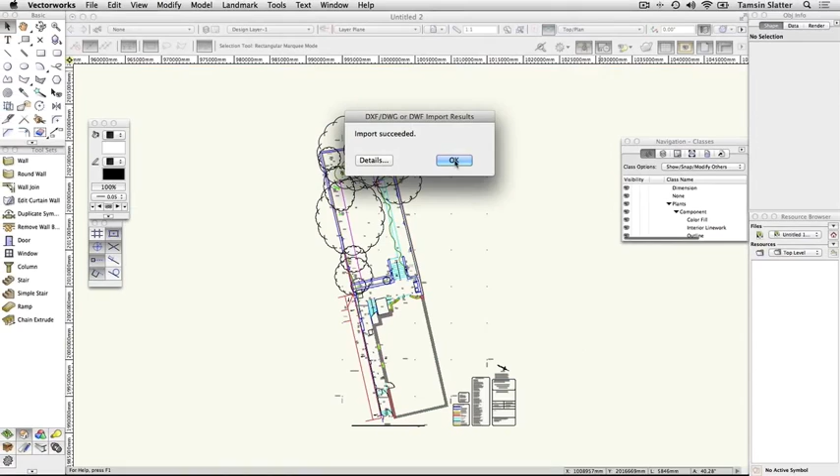Now examine the file structure. Turn your attention to the navigation palette. Click on the Design Layers button. Design layers represent the piece of paper on which you are drawing. They are usually used to separate items in 3D space, think of the floors of a building, or to separate stages of the design process.

This file contains the original Design Layer 1 and a new design layer with the same name as the imported DWG file, and this is the active layer.

Click the Classes button on the navigation palette. If you're familiar with AutoCAD, these classes are the equivalent of DWG layers. Classes are a classification system used to distinguish different types of objects from each other. There are many classes in the file, their names all prefixed with the word survey, so that you can clearly distinguish them from your own classes.

Press and hold the Alt key on Windows or Option key on Macintosh and click the disclosure arrow to the left of the survey class. Notice that you can close the list of classes in this way. Press and hold the Alt key on Windows or Option key on Macintosh again and click on the disclosure arrow to open the list of classes.

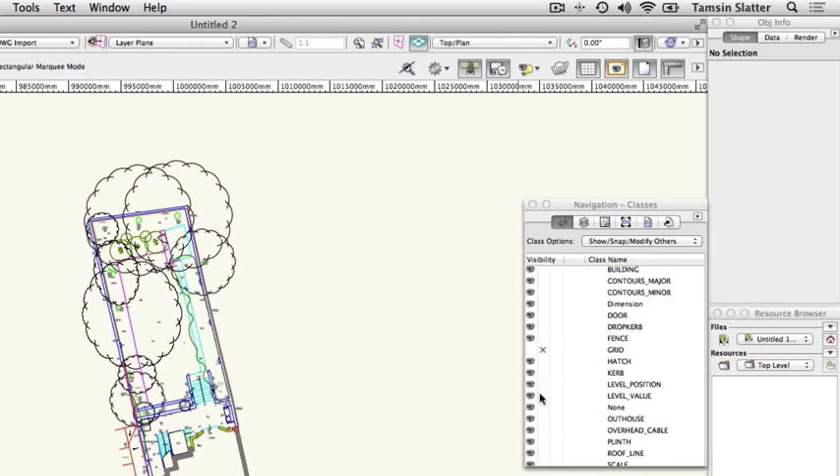Three columns to the left of each class name represent visible, invisible and grey. Locate the class Survey Level Value and click on the invisible column to its left. All elements on the drawing belonging to this class are now invisible. Restore their visibility by clicking on the visible column.

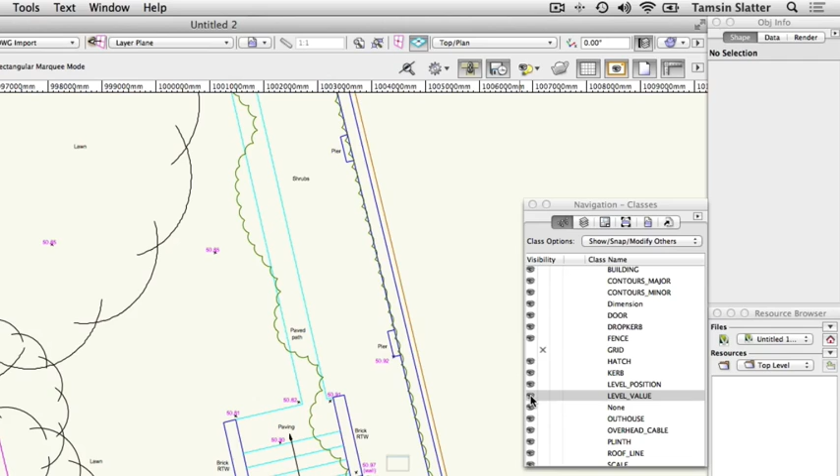Both design layers and classes can have their visibility controlled using the navigation palette. However, they have different purposes. Design layers are the physical location of the drawn objects, while classes are like a club membership used for classifying different types of objects. You can edit classes to add graphic attributes to them so that all members of that class look the same. Change the scale.

After you import the file at 1:1, you may wish to change the scale. 1:1 is always a good starting point with imports, as it's likely the scale at which the file was created, but you may wish to work at a different scale.

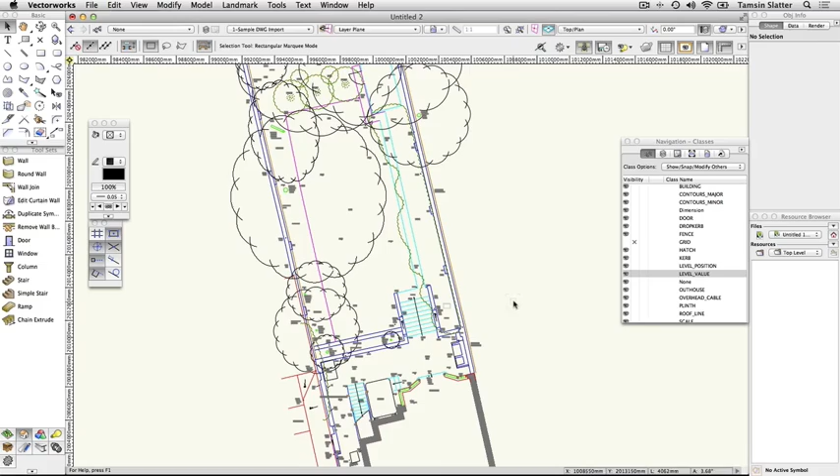Click on the Scale button on the view bar. Choose the scale you want to work in and check the All Layers box. Also check Scale Text and then click OK. Click the Fit to Objects button on the view bar to adjust the plan to fit on your screen.

Don't be concerned if the imported site doesn't fit on the drawing area. You can change the scale of your layer at any time, but you'll later see that you can present the drawing at any scale when your design is complete.

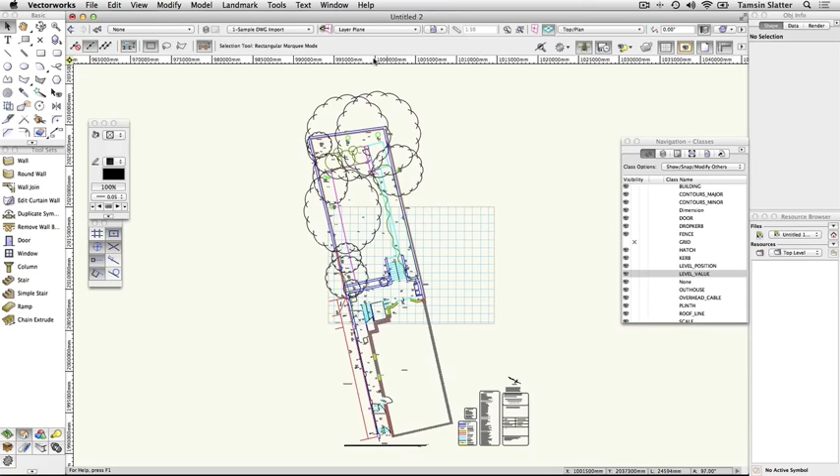Understand the origin. Notice the coordinates of the site on the ruler. Vectorworks has preserved the coordinates of the original file. In other words, the geometry is in exactly the same place as the surveyor or architect originally drew it in their file. This is important if you'll be coordinating drawings at a later stage in the project.

The plan has been drawn at an angle. To be able to draw orthogonally or square to the page, you can rotate the whole page temporarily to line up with the rulers as if you were drawing with a parallel motion.

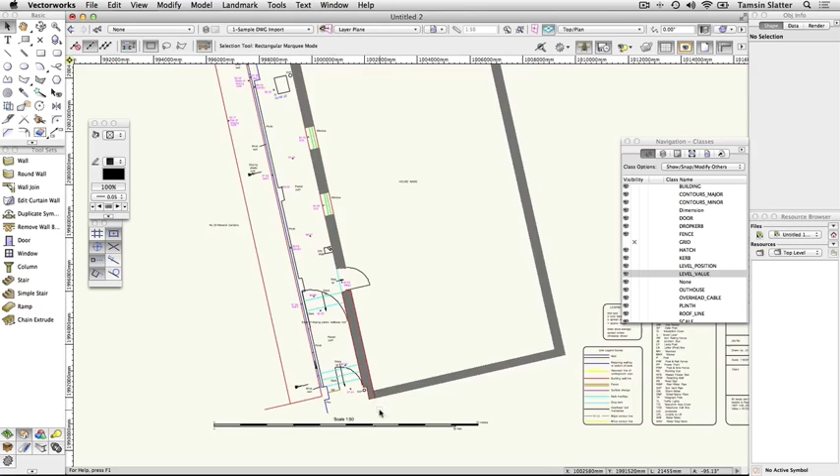Click the Rotate Plan button on the toolbar. Click on the lower left corner of the house, and then click again anywhere along the lower edge of the house. The entire drawing will rotate to line up the house with the bottom of the drawing area.

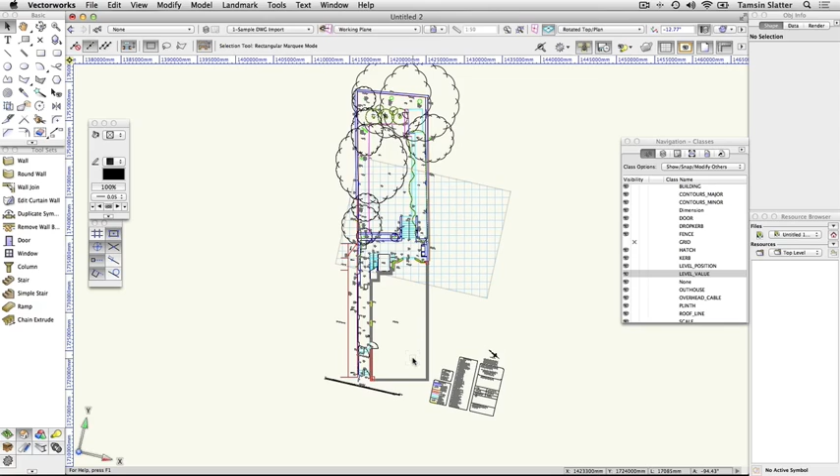Tools such as the rectangle tool, wall tool, and so forth will now easily snap horizontally and vertically and line up with the house, if that's desirable for your design process. To return to the top plan view, use the View menu on the view bar and choose Top Plan.

Save your file if you wish, using File Save. We won't be using it again as it's a standalone example designed to teach you this process alone.

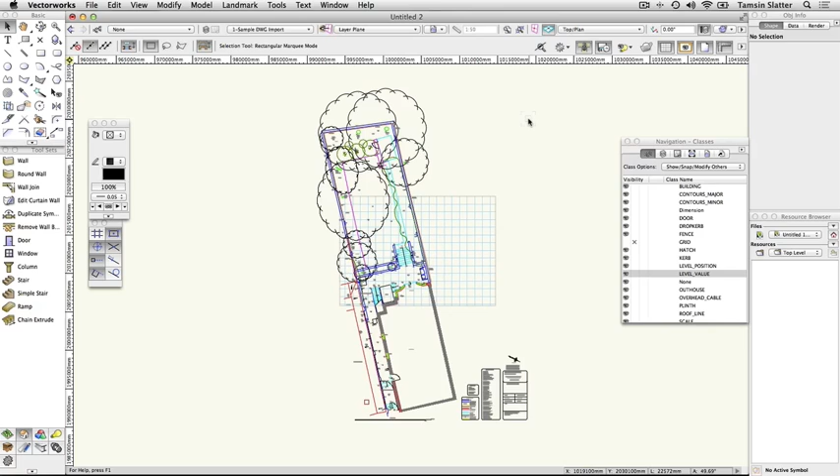An important part of the import process is to always check the size of the imported elements. The use of an incorrect import unit will result in a file that's the wrong size. Note that PDF files or image files, scanned hand drawings for example, can also be imported. Examine the File Import menu to see the range of different file types that can be imported.